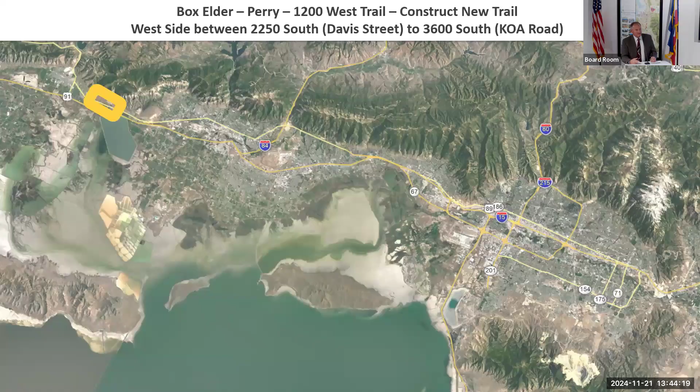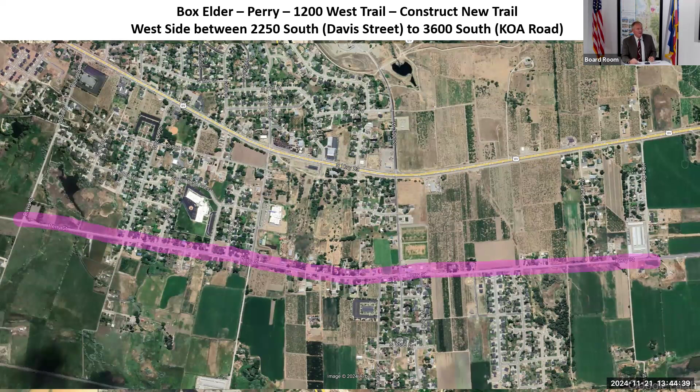The first project we have to look at today is a project up in Box Elder County. This is a project in Perry, on 12th West in this particular area. It runs from 2250 South, known as Davis Street, going south to 3600 South, or the KOA road. The project is to construct a pathway or trail on the west side.

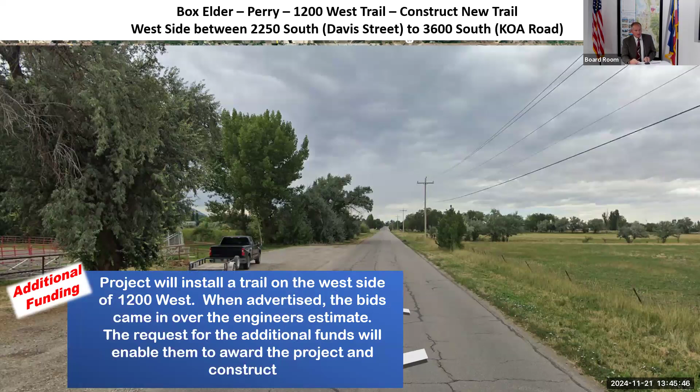This project has gone out and was advertised. However, when the bids came back, it was well over the engineer's estimate. So the request for this particular project today is to add some additional money - over $555,000 of local funds being added to the project, as well as an additional $945,000 of the state TIF active funds. That brings our total project cost up to $3.9 million.

The next board modification or amendment we have before us. Maybe that was a secret button Andrew controls.

This next project is the Utah Trails Network. Over the past several months, the Utah Trails Division has been developing a strategic vision of the Utah Trail Network throughout the state. This information will be used for future Utah Trail Network projects. During this process, the project team identified additional scope items that would be beneficial to include in this first part of the process, including additional public outreach and engagement.

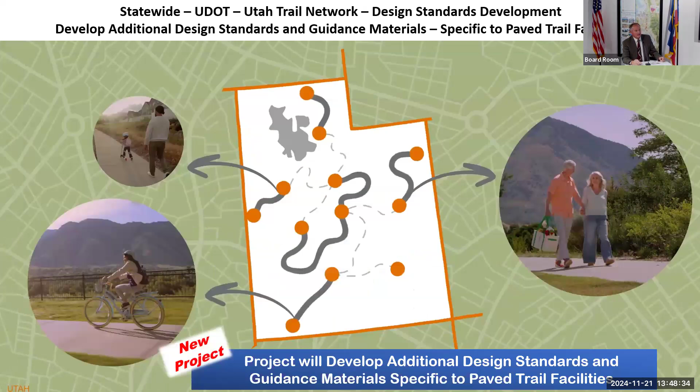That request is to add a new project for $600,000 to the program, and that would include all of the projects. That blue screen come up real quick. That involves all of the board modifications for the TIP for this round.

Can you clarify for me, so that's design standards for our trails? Correct, it's to improve design for pavement on our trails so they've got a process as well as the way to maintain or take care of these trail projects. Ben may be able to add to that. Ben, if you can find a microphone that works, maybe you have two now, I know everybody's got one.

So there are some existing standards for multi-use trails, that type of thing. As our team has looked at the Utah Trail Network, they've identified some spots where they want to fill some gaps in our design standards. With the goal of having consistency for the Utah Trail Network, like signing, the vision is this is like the interstate system of trails. So there's additional work to look at what types of widths and striping on certain types of facilities within the network, signing, stuff like that. So design standards means creating additional design standards that can complement the existing ones we already have for trails.

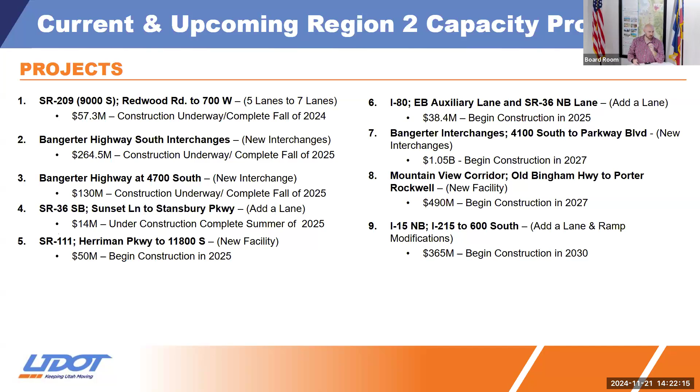That's what we have on the plan from a highway perspective here in the Salt Lake Valley. I know Nathan will be talking about what's happening up in the other counties to the north. But I also want to highlight, here's a map of where those projects will be occurring over this next little bit. That's $2.459 billion being invested into highway construction. It's a large number of things going on just here in the Salt Lake Valley, not including the whole state.

With that, I think there's some other projects that are important. Can you back up just for one slide? Yeah, no, go one more. There you go, right there. Thanks.

Sometimes I was reminded about this in a meeting I had earlier today by an elected official whose name I won't note right now, but they said sometimes when we as staff talk to elected officials, we assume they know exactly what we're talking about. This was a great presentation, but I just want to back up for a sec for a little bit of reminder context. All of you know this already, I'm sure, but just as a reminder.

So UDOT's service area is divided into 4 regions as a starting point. For our WFRC purposes, Region 2 covers Salt Lake County and Tooele. We don't cover Summit County, but for here, it's Tooele and Salt Lake County. Region 1 is everything north, Davis, Weber, Box Elder, et cetera. Then Region 3 is Utah County, and Region 4 is down in the south. I'm not hitting every county, but just so you're thinking in this room, where am I? Region 2, Region 1. That's point number 1.

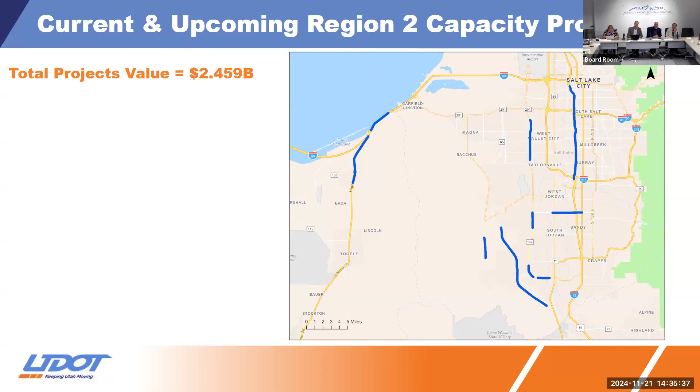Appreciate it. So the next thing I wanted to cover was some of the major projects outside of our region. We'll hear more from Nathan on a few of these. One going on right now is in our Region 3, Utah County, over in the Saratoga Springs area - the Mountain View corridor from 2100 North to Porter Rockwell, building that new facility out by the base around the edge of the mountain and connecting into Porter Rockwell, where the next phase is to go forward to Old Bingham. That's expected to be completed next fall.

We also have a large project going on - the EIS was just completed for I-15 Farmington to Salt Lake City. On our line number 4, you'll see the large I-15 reconstruct from Farmington to Salt Lake City. This will be a major addition in capacity, and I'll let Region 1 go into more details about that project. We also have a large pavement reconstruct I want people to be aware of happening over this next year - our I-215 reconstruct from SR 201 to North Temple, where the pavement will be completely rehabbed and reconstructed, beginning construction next year.

Those are the projects we have from a capacity standpoint. You'll see that's another $2.44 billion being spent just outside of Salt Lake County that we're widening and adding capacity to. I do want to note these are just the highway capacity projects.

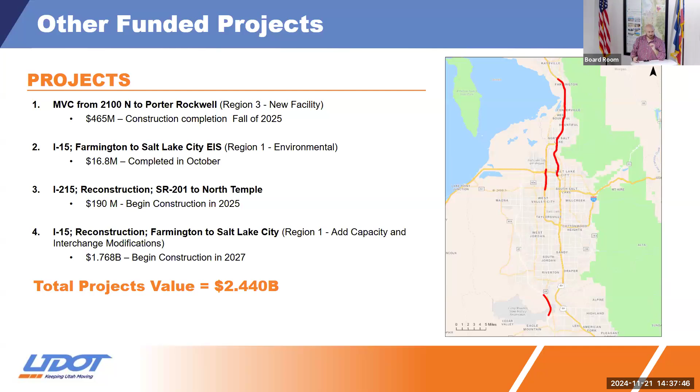This does just look out 5 years, so it isn't looking at that long range - that's where Andrew is 100% correct. If you're looking at that long range plan WFRC is putting together, that's where you'd have to go find the unified plan to see those farther out projects. These are what are programmed and actually have funding for them. Any questions on the STIP app or anything presented?

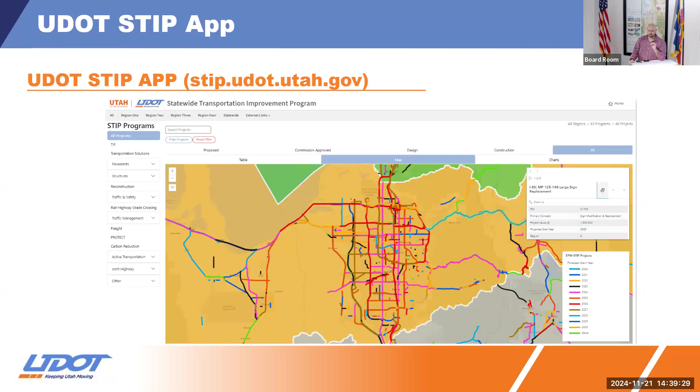Nathan, you want to talk Region 1? That's my favorite. Is it?

My name's Nathan Peterson. I am the Deputy Director for Region 1. My program manager was unable to be here today, so you have me, which is hopefully a good thing. Region 1 is Davis County, Weber County, Morgan County, Box Elder County, Rich County, and Cache County — that whole northern panhandle of the state of Utah.

We are growing rapidly, not just in the WFRC area, but in all areas of northern Utah.

Before I start the presentation, I want to talk a little about the Prairie Trail, because I have some additional information. I apologize, Commissioner, I was frantically looking for information when you were talking, so I may not have caught all of your question.

On that bid, we received 5 bidders, which is actually a really good response. There was a wide range, probably $1 million between all the bidders, which tells me some contractors were aggressively seeking the bid and others were maybe not as hungry, looking for a larger profit margin. We're happy to receive the funding and be able to go to award on that project, and it will be a great project.

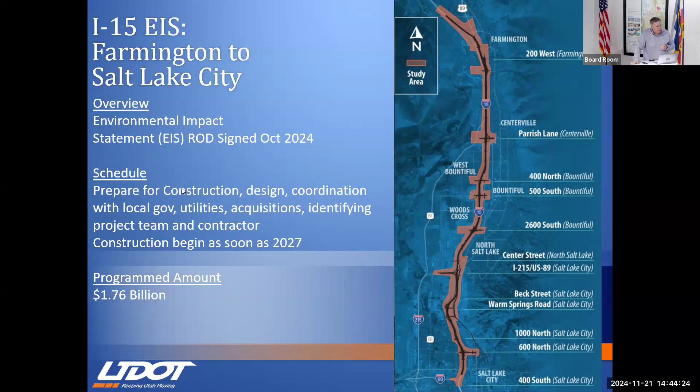They have a goal of trying to start construction in early 2027, but that is a heavy lift, and there'll be a lot of press releases and information forthcoming on that project.

Kind of running the TV and my laptop. My eyes are starting to get a little aged, so I need to look at my laptop to see my notes in a little more clarity.

Shepard Lane, I don't know if you're in the Weber Davis County area, but on your way to the meeting today, you went through a large construction zone in the Shepard Lane area. It's a large interchange project. Shepard Lane was just kind of over I-15. This will be a full access interchange, with access over the tracks and down to the west.

If you know Farmington, that Station Park area is growing in that northwest quadrant quite a bit and becoming heavily populated with commercial and residential, which causes a lot of congestion on Park Lane. The idea here is to provide an additional full service interchange which can alleviate some of that pressure at Park Lane.

Along with the Shepard Lane project, there's also appropriation to help provide pedestrian traffic along Park Lane - some bridges over the I-15 area to try to get into that Station Park area, not just for retail and commerce, but we also have the FrontRunner station there. So this helps with additional modes of transportation in that Farmington area, and once you're on FrontRunner, you have full access up and along the Wasatch Front.

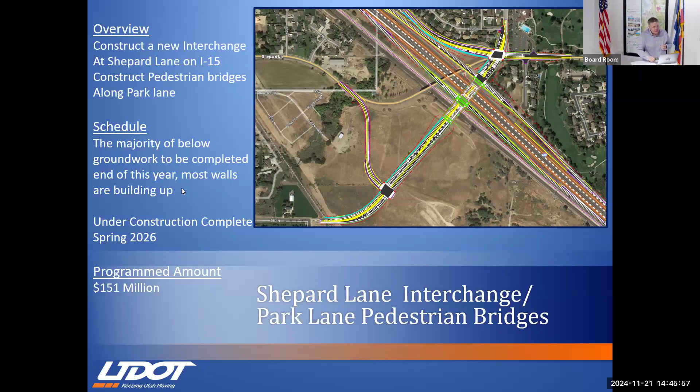If the Mayor from Roy was here, he would probably rah-rah this project. We've all heard Mayor Dandoy talk about this project, 5600 South.

This interchange project is twofold. It is a new interchange at 5600 South, which will provide access into Hill Air Force Base. If you've ever been in that Clearfield area, you know at quitting time Hillfield can become very congested. There's been a lot of improvements in that Clearfield area and on Hillfield.

Hill Air Force Base has generated a lot of jobs and retail, and there's just a lot more trips in that area. So this interchange will help provide additional access to the base, and it also provides additional access out west with the widening of 5600 South from a 3-lane section to a 5-lane section. Its western terminus will be SR 108, 3500 West, out there in the western Roy area.

Like Andrew was talking about, the Bangerter Highway - I'll talk a bit about that with our SR 108 projects. You need that north-south mobility. We often complain about north-south mobility throughout the valley, but a critical component is to get east-west. You need those additional options other than I-15 to go north and south.

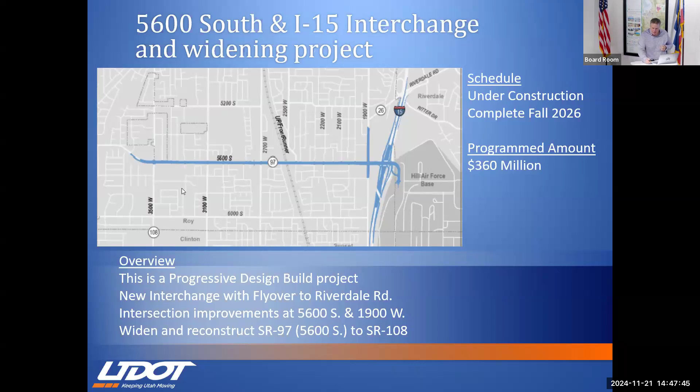Mayor Dandoy from Roy City wasn't here to give you a rah-rah, but he would if he was here. Commissioner Harvey from Weber County did give you a big thumbs up on this project - so that's the city, the county, and UDOT working together.

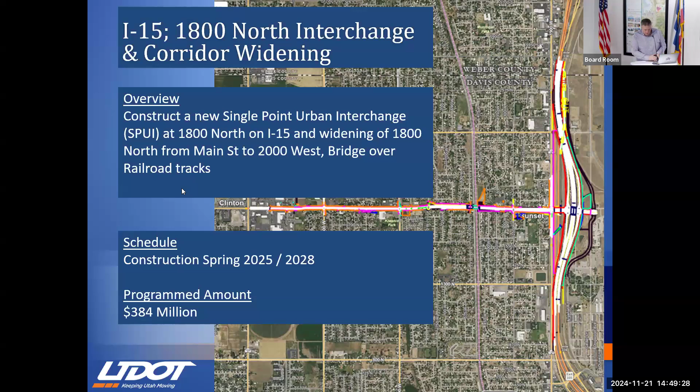Can I ask a question while you're heading towards that? Part of that reconstruction area is also going to be having—I think this is what Mayor Dandoy would also say—that active transportation piece that is part of that corridor you just talked about. Maybe you could talk about that more, or is that pretty much where that's at, or is that going to be included in this?

To my knowledge, that is all being included. There's several trails, the old D&RG rail trail system that goes through there, and a path along the corridor which will help with connection. I know Clinton was awarded money for an underpass under SR 108, a project which will help tie those trails on the east side of 108 out to the western side of Davis and Weber County, which has a progressing trail system out there. So that's a critical component for that connection, and it will be included on our SR 108 project. Yes, that's being designed and worked into those projects.

That's the three-gate trail, the one that MIDA purchased. Well, the three-gate trail is in that study phase, and that is something that is also being looked at. That's what she's talking about. Yeah, it's a separate facility.

Okay, yeah. I was thinking about SR 108 going, 1800 North paralleling. Thank you, Commissioner Harvey, for that clarification. Give you the thumbs up today.

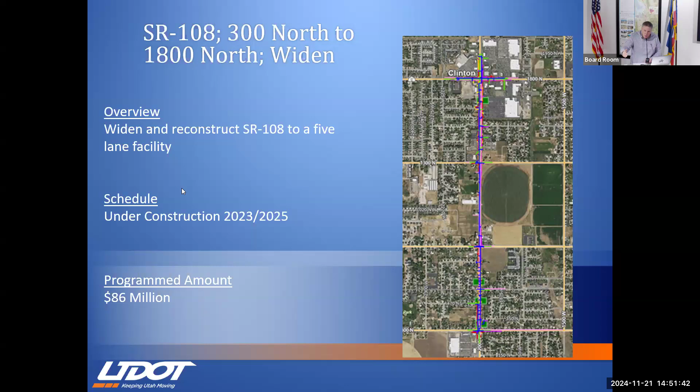Right after that is from 1800 North up into Northern Roy. We will have another segment of SR 108, currently in design and right-of-way acquisition, which will be ready for construction in 2027, and that will most likely be a two-year project. It's currently programmed at 123 million. But this will complete the majority of SR 108, giving us that north-to-south corridor on the west side of Weber and Davis County.

And obviously those improved alignments of 1800 North and 5600 South will help us with that complete grid system. That's something we can't emphasize enough, and probably something you can take back to your planning commissions and city councils as you look at development. Think of those grid systems to help out with transportation, to get people to the major collectors and arterials and to transit. It's something we need to be looking at, and it helps with the overall operations of an area.

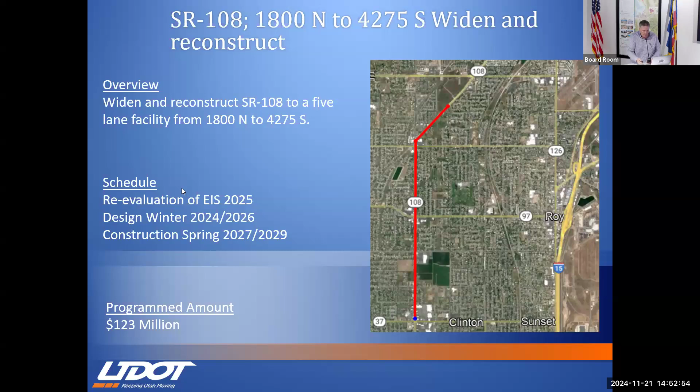Another project that has been on the books for a long time in the Ogden City area is the 24th Street interchange. This is currently a half interchange, and this project will make it a full interchange, so you'll have full movements north and southbound. It's been in the works a long time. If you're familiar with the area, you'll notice a major landmark of Weber County is no longer there—the Farmers Grain Co-op, the large white granary, has finally been demolished, and that has added some nuances to this project that we previously had to avoid. The project team has been looking to redesign to maximize efficiencies by not having to avoid that granary, to help lower the cost of the project. So it's slowed the project down, but for a good reason.

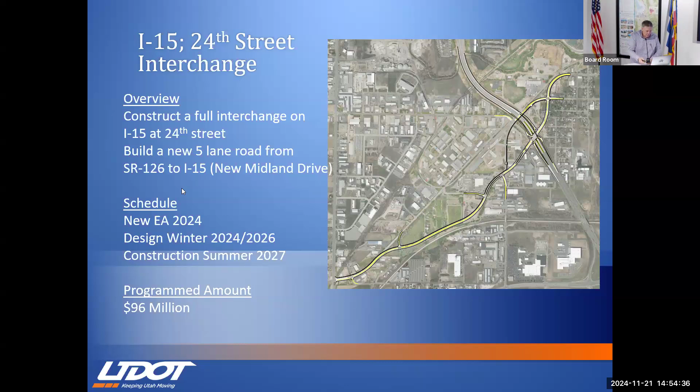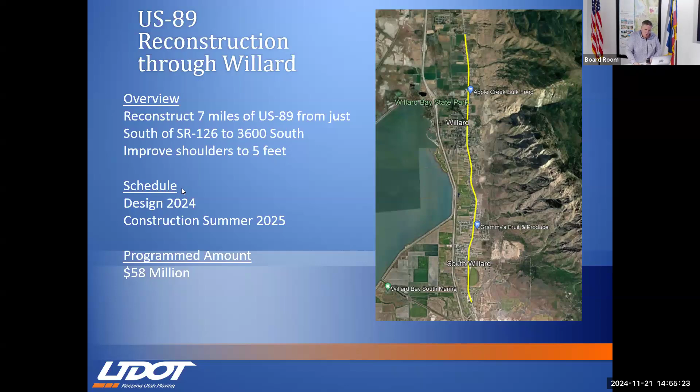Not to forget our neighbors up in Box Elder County, the northern area of Wasatch Front, up in the Brigham City area. We have a reconstruction of US 89 through the Willard area. This is currently out to bid, and we're hopeful to have construction beginning next year. This will improve the pavement, shoulders, and drainage system, and some access locations. If you've been up on the Fruitway, you know those driveways are right there on the road, and we're trying to delineate those driveways better and make it a safer corridor for both active transportation and vehicles. It's programmed at $58 million, and that is out to bid right now.

A project that Commissioner D is probably looking forward to, the US 89 I-84 interchange replacement project. As US 89 through Davis County was completed, it left this section right at the mouth of Weber Canyon. It's been going through the environmental phase, and that was completed October of this year. So we are now in the process of beginning our design.

I know our project team has been looking at delivery method, and they would like to model it similar to the US 89 delivery method, which is a progressive design build. What that simply means is the department will enter a contract with a contractor and a designer who are members of the same team, which allows us better collaboration through the design phase. We also have a contractor who is invested in trying to find efficiencies and help us with construction phasing and methodology, which helps us receive a lower bid in theory.

We are in the process of trying to come up with that contract. It is currently programmed at $250 million, and we're hopeful to have construction going by 2027. This is phase 1 and phase 2 of that project, which is a new interchange at I-84 and US 89, and also work at the railroad bridges that cross over US 89. The replacement of those will provide additional width, which helps us with mobility up and along US 89. So a project which we're really excited for and look forward to.

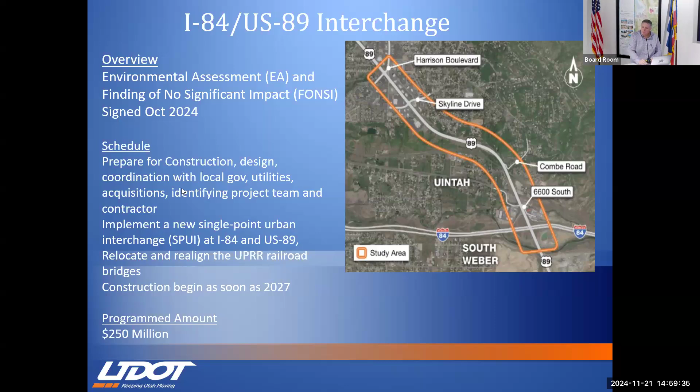I don't know if you have any additional questions. Okay, that's fine. We could probably talk more specifics about the project after.

And with that, it seems like I've been up here a long time. But I will open it up for questions, not just on these projects, but if you have any other transportation-related questions for my region, for that Davis-Weber County area.

The one that's not on there is future plans at 650 North, as MIDA now pushes for development at that portion and is courting some big office users. Where does that sit in the long-range plan? I believe that is still in phase 1 of the plan. It's unprogrammed right now. We have several interchanges - I'd say 650 and 2700 North up in that Pleasant View area are probably the two on our radar. They are the most congested interchanges for Region 1, and they are being looked at. We're hopeful for programming in the future for those interchanges, probably a reconstruction type project.